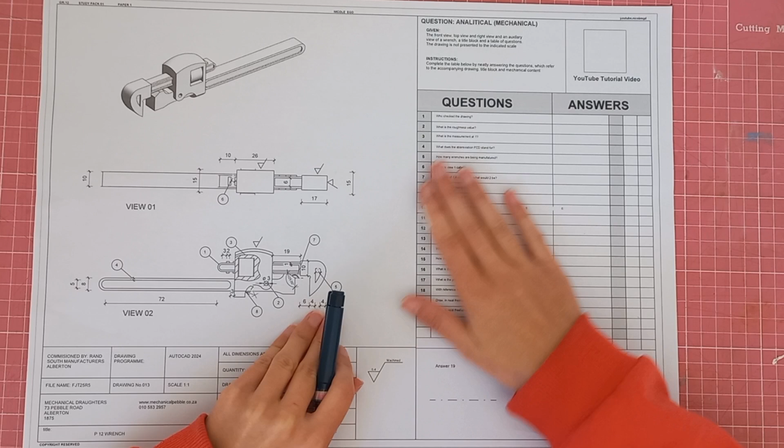Complete the table below by neatly answering the questions which refer to the accompanying drawing, title block, and mechanical content. So it says, who checked the drawing?

We're going to have a look and we'll see checked by Gerry. So we will write Gerry. Then it says, what is the roughness value?

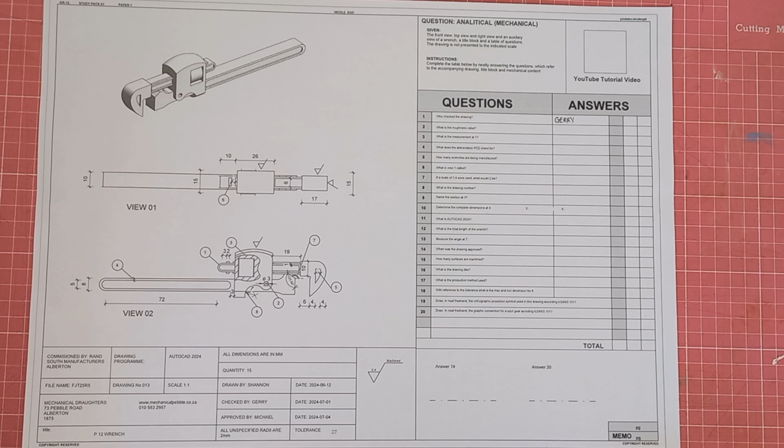This is something you should know based on your studies, where to look, and the roughness value will be 0.4. So you are going to write 0.4.

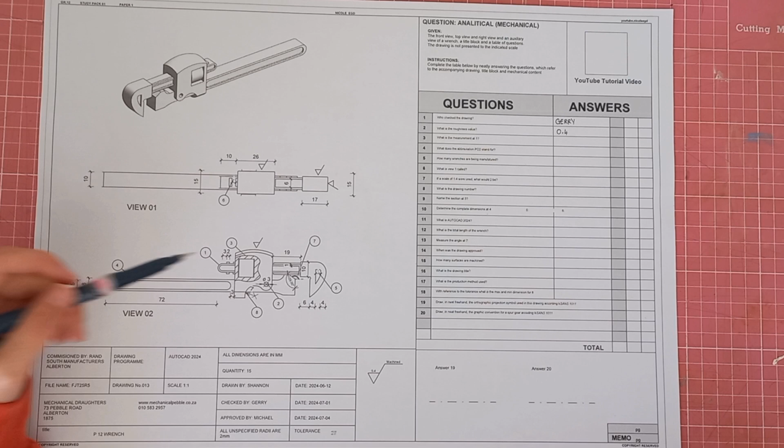Then it says, what is the measurement at 1? We're going to look at 1 over here. You can see 1 is pointing to this inner circle, and because we do not have that measurement given to us, if you look around, you won't see the measurement for any of the circles specifically. We know we will have to look where it says all unspecified radii are 2 millimeters.

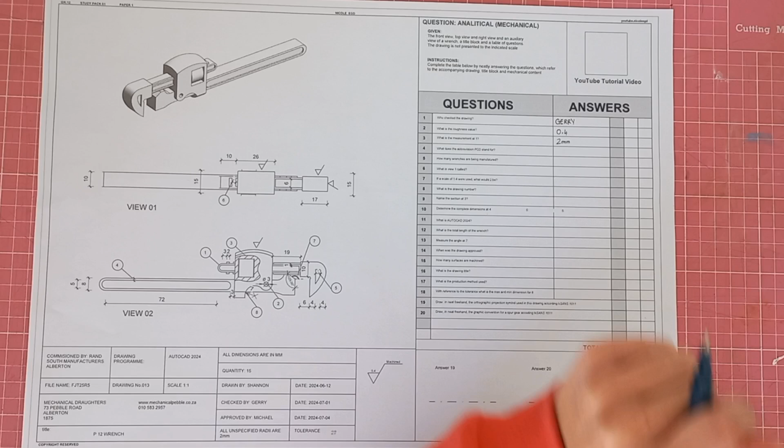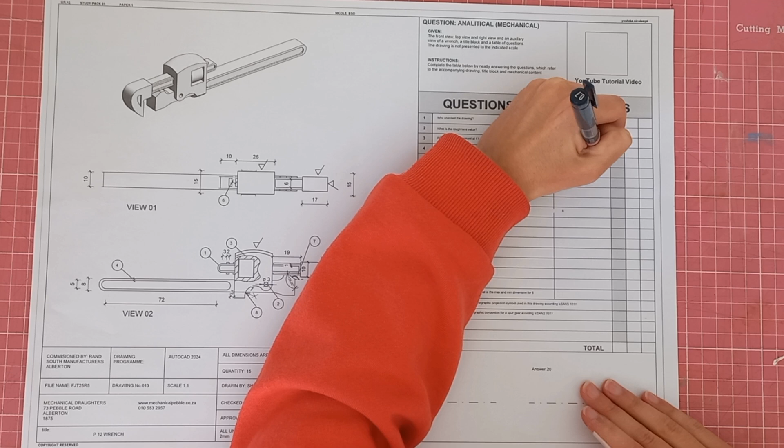So we know the measurement at 1 is 2 millimeters. Then it says, what does the abbreviation PCD stand for? PCD is something you should be aware of, something you've studied. PCD stands for pitch, circle, diameter.

Then it says, how many wrenches are being manufactured? If you have a look here, you'll see quantity 15, and so 15 wrenches are being manufactured.

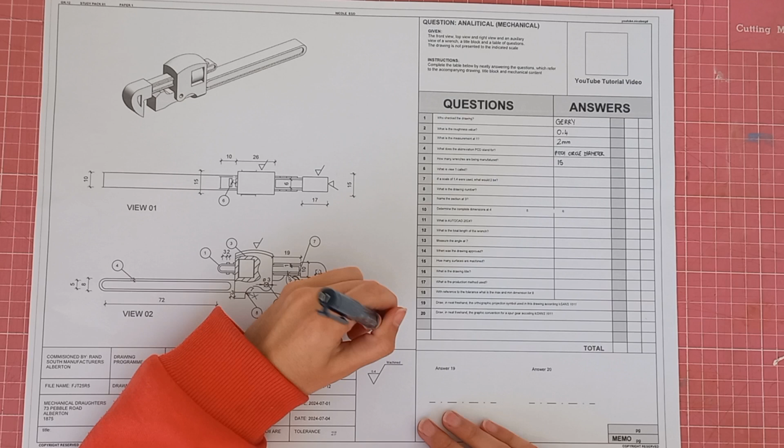Then it says here, what is view 1 called? We know based on the drawing that because this is a mechanical question, we are working in third angle orthographic projection, which means we have top and front. So view 1 would be our top view, so we would write top view.

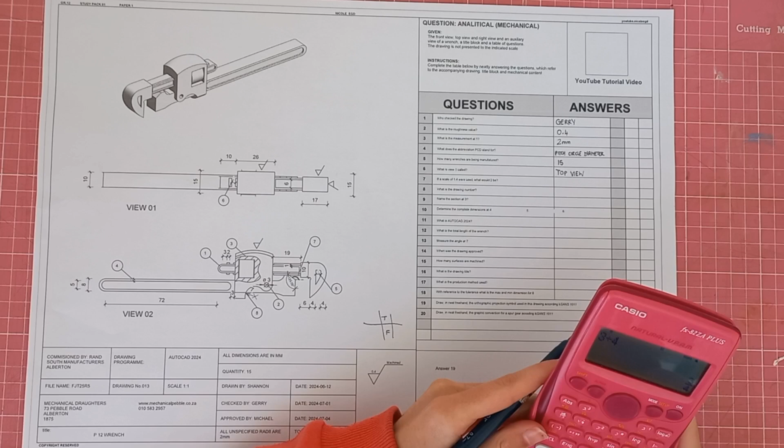Then it says, if a scale of 1 to 4 were used, what would 2 be? So we look at the measurements of 2. It's got a diameter of 3. We know this means it would be 4 times smaller, so 3 divided by 4 gives us 0.75. So a diameter of 0.75 would be used.

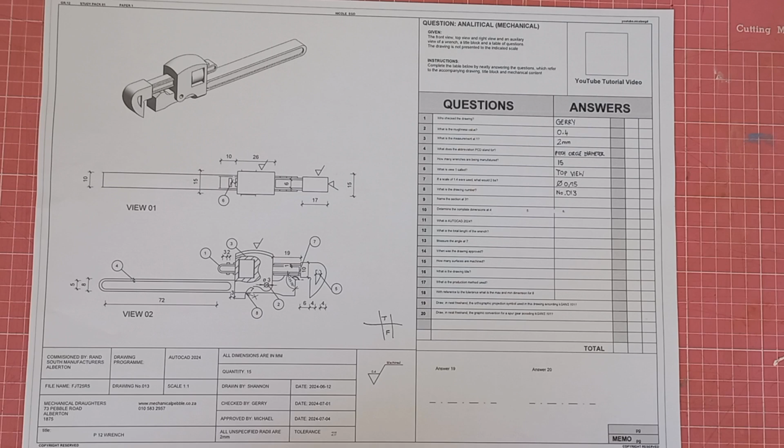9. Okay, name the section at 3. So you'll see 3 is pointing to a little piece over here, and because it's not a full section, it's just a small little section that has been sectioned, it is called a part section. So we will write part section.

Then it says complete the dimensions at 4, 5, and 6. So we are going to have a look firstly at 4, which will be this point here. We obviously are going to have to work this out, and the reason why is because if we have a look here, we haven't been given the measurements for this.

Sorry guys, the cat's just busy driving me mad here. I don't know what he's doing. Okay, so obviously we have not been given that measurement.

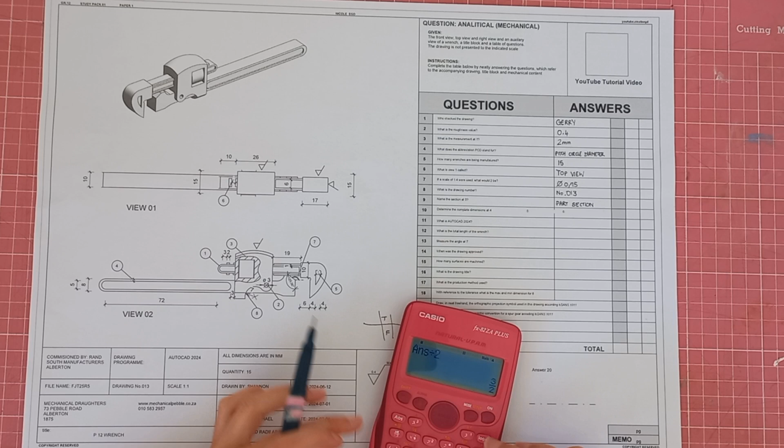We've been given a measurement here of 1, but it's best not to assume what the measurement would be, so we're going to work it out. We've been given a full measurement of 8 and 5, so 8 minus 5 gives us 3, divided by 2, which gives us 1.5. So we will say 1.5 millimeters for 4, and as you can see, it's not the same as 1.

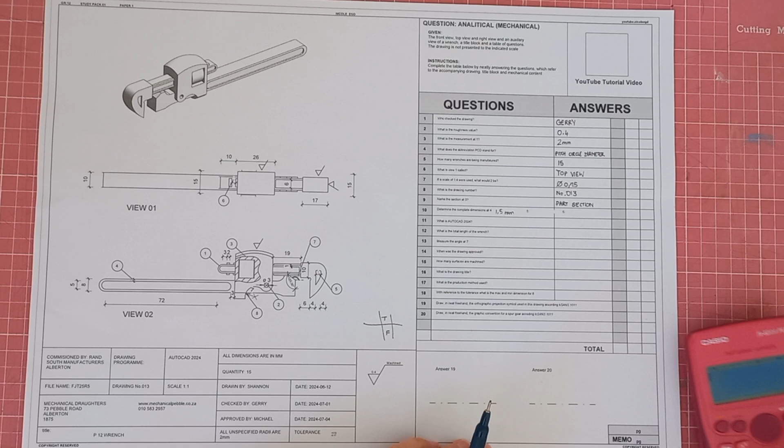Then it says we need to determine the measurement at 5 as well. So we're going to see 5 over here, in the middle of the wrench, and we've been given measurements here, here, here, and this measurement over here as well. So we are going to use this to help determine what it is. We've got 17 minus 6 at this point, then 6 minus 4, which lines up here, minus 4, which is the edge over here. That will give us a measurement of 3 millimeters.

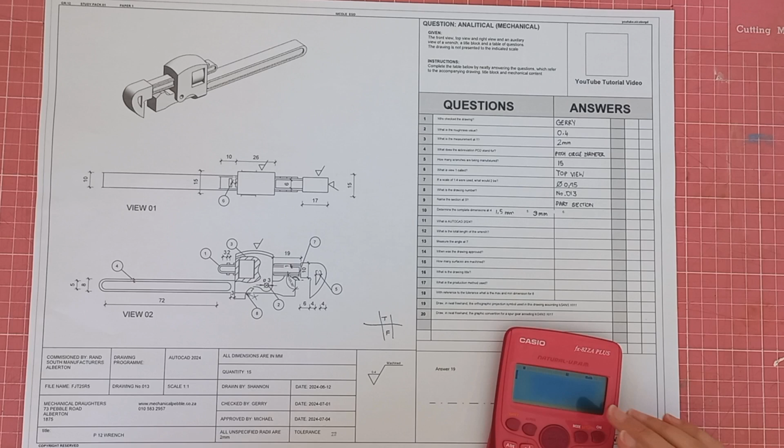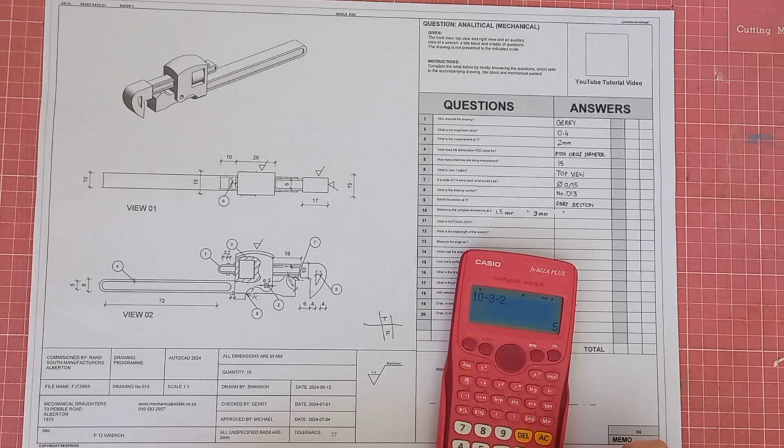Then we've got number 6 that we need to determine a measurement for, and you can see it's got these little gaps here. We've been given a measurement of 10, 3, 2, and we are going to need to determine the radius over here to get the full measurement, because if we have 10 minus 3 minus 2, we get a measurement of 5, but it does not include the circular bit. We know we have a radius of 2, since all unspecified radii are 2, so minus 2, and then it's got a thickness of 1, so minus 1, which gives us a total of 2 for that little section. So that becomes 2 millimeters.

Okay, what is AutoCAD 2024? The answer will be that it is the drawing program. So you are going to write drawing program.

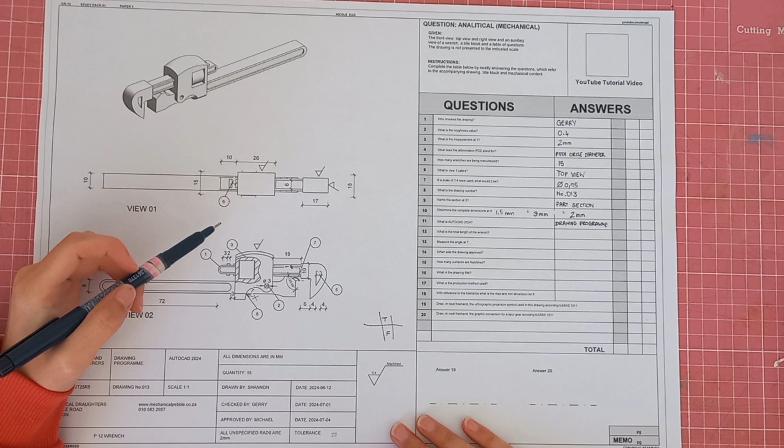Okay, then it says here, what is the total length of the wrench? We're obviously going to have to work that out. So we can start off, we've got 72, okay, and we have got 10, 26, 17, 19. So let's start by adding from this way. To me, that would make the most sense. So we have got 17, then we move on, we've got 19.

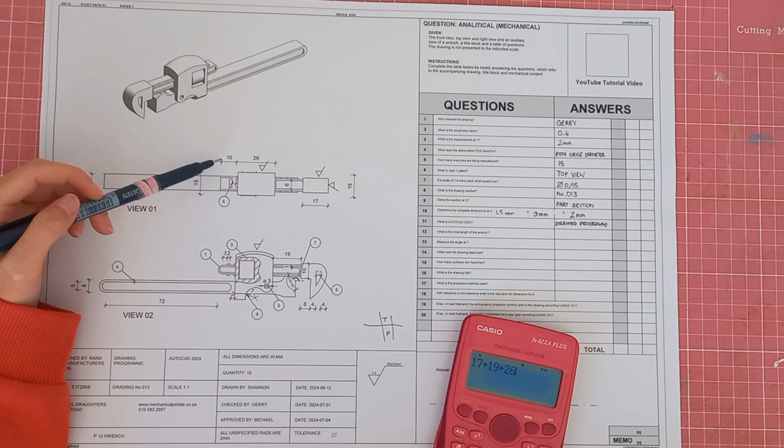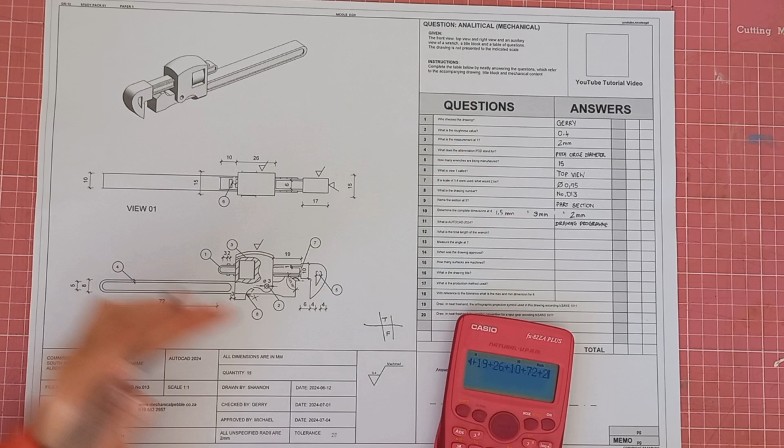Then if we have a look here, this full length here is 26, so we're going to say plus 26. Then we have got here a measurement of 10, which is obviously from this bit here, so we're going to say plus 10. Then we have obviously got 72 from this point onwards, so we're going to say plus 72. Okay, but again, we've got the circle here that we need to account for. So we've obviously got the unspecified radii, which will be 2, so we're going to say plus 2. And then we've obviously got 1.5 for the edge over here, so we'll say plus 1.5. And that will give us a full length of 149.5.

Okay, millimeters. All right, then it says measure the angle at 7.

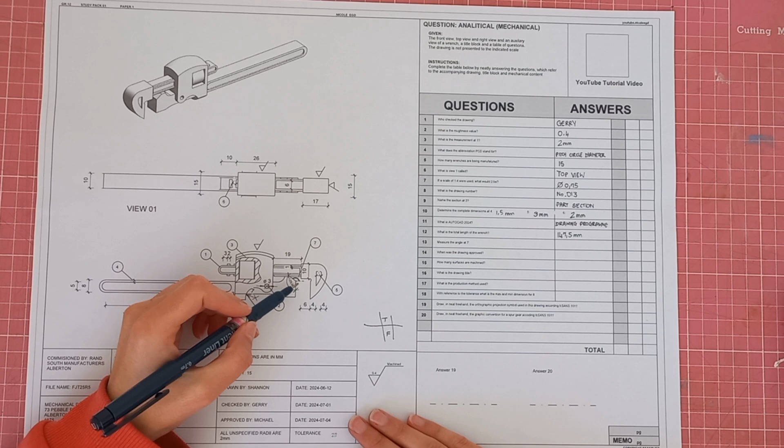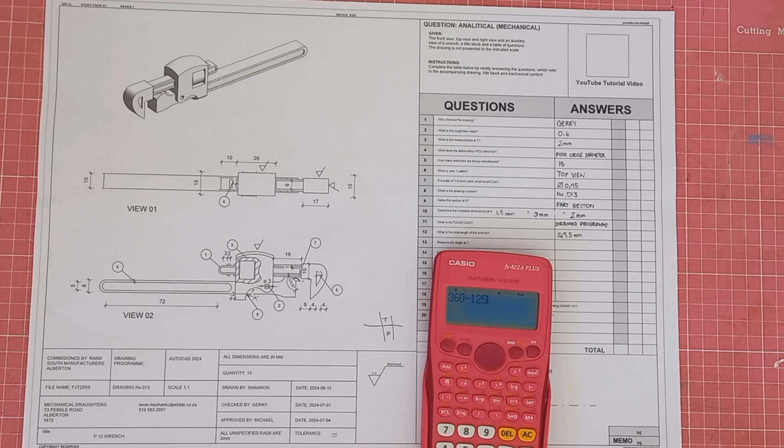So if you have a look here, we've been given an angle over here. So there are 2 ways to work it out. You could obviously use your protractor if that is what you would like to do. But if you are more mathematically inclined and you'd rather use it a different way, which I'm going to use, you can do angles around a point, which we obviously know a full rotation will be 360 degrees. So we'll have 360 degrees, minus the 125 degrees. Then we are going to minus this here, which is 90 degrees. Obviously, just make sure with your ruler beforehand, but yeah, it is 90 degrees. So we're going to say minus 90 degrees, which leaves us with 145 degrees.

Okay, then it says, when was the drawing approved? So we're going to see approved by, then we get the date. So we're going to say 2024 of the 7th of the 04.

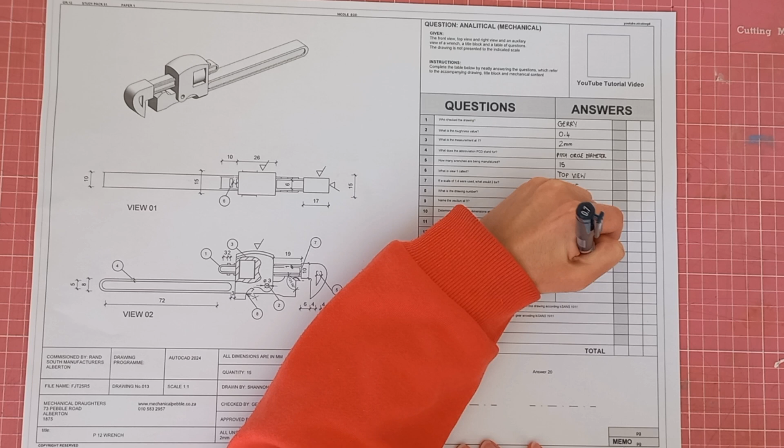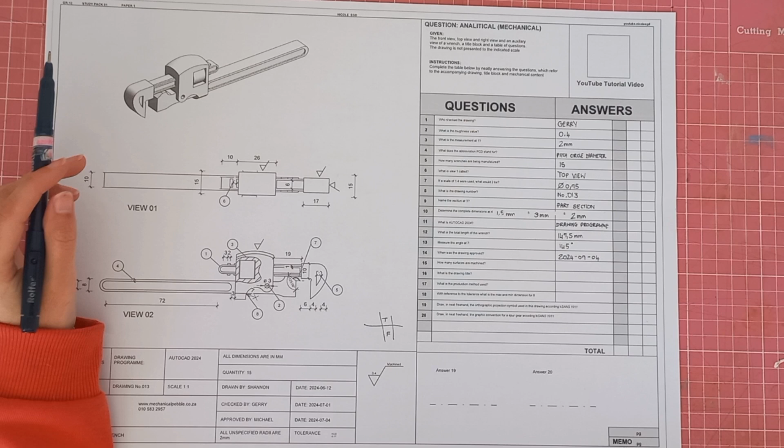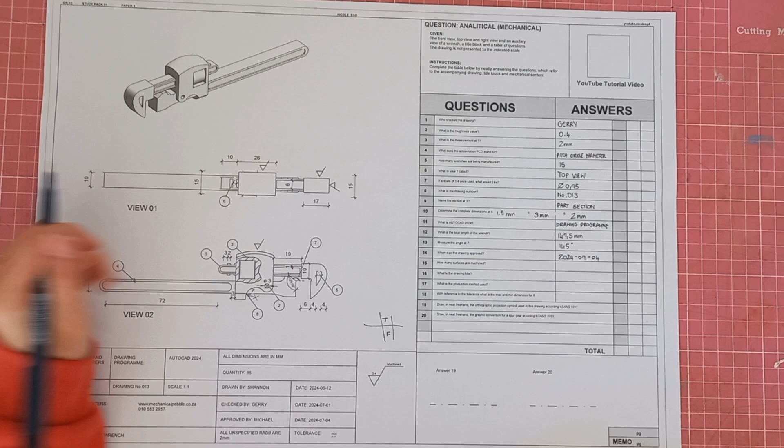How many surfaces are machined? Now this one is very important for you guys to make sure you know what this means. So we know that this machining symbol over here shows that this top side needs to be machined, so that will be 1. Then we have got 2, 3, 4, but that is not a complete answer because the top here would be 1. Then we've got 1 here, but that means that this side here would also need to be machined, and that's something that we can assume. So it'll be 1, 2, 3. Same with this side here, 4, 5, 6. Okay, 6, and the bottom here, which would be 7 as well. So we are going to say 7 surfaces need to be machined.

Okay, then it says what is the drawing title, and if we have a look here, the title is P12 wrench, so you can just write P12 wrench.

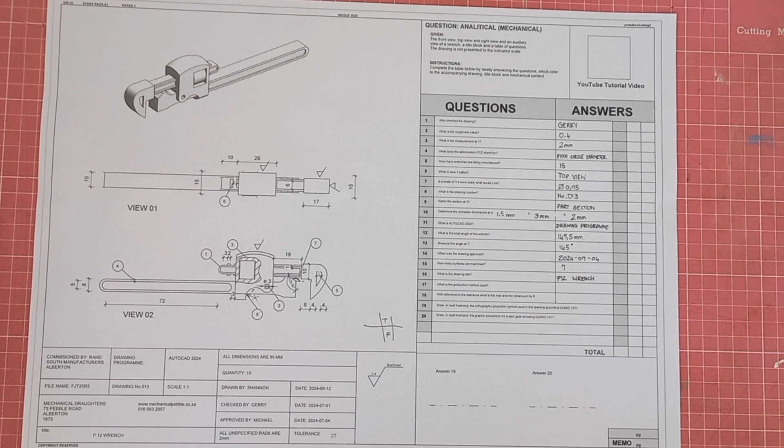Okay, what is the production method used? So we're going to have a look here, and you can see the production method is machined, so we are going to write machined.

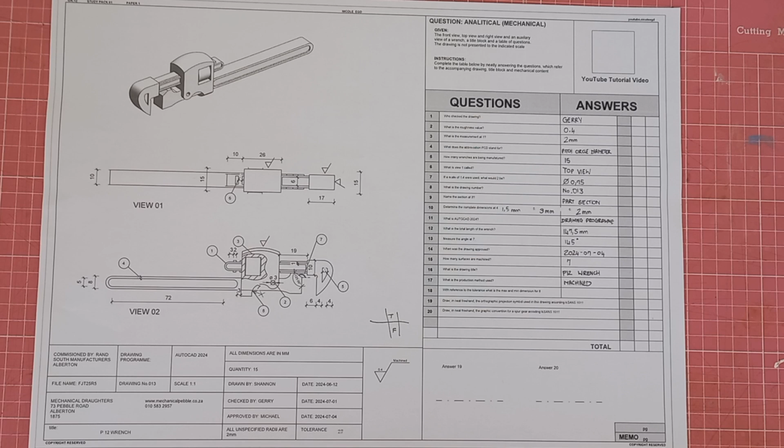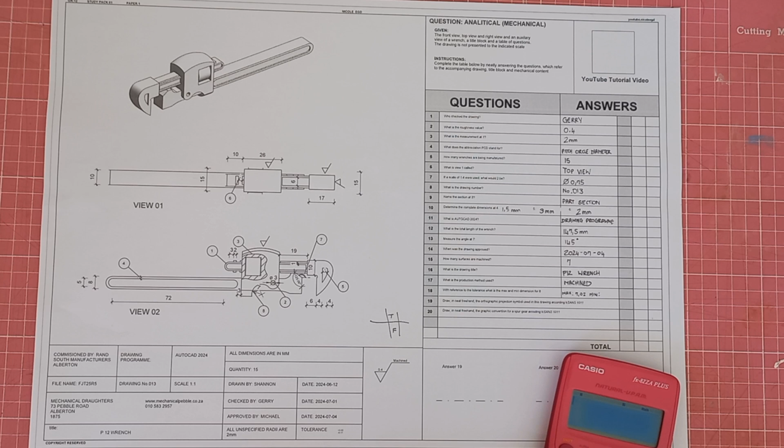Okay, and then it says with reference to the tolerance, what is the max and minimum dimension for 8? So we're going to find number 8 first, which is here, it points to obviously 7. So the max would be plus 0.02, so we would have 7.02, and the minimum would be minus 0.17, so we would have 7 minus 0.17, which would give us 6.83.

Okay, then it says draw in neat freehand the orthographic projection symbol used in this drawing according to SANS. Okay, so that's obviously answer 19. Now, because we know that this is third angle orthographic projection, our projection symbol will be a circle followed by another circle. Just make sure yours is done neatly in freehand, followed by this over here.

Okay, and then it says draw a neat freehand the graphic convention for spur gear according to SANS. Okay, so this one's going to be a little bit more tricky. This is obviously something you would have had to have studied in order to know what that is. So let's just do it together.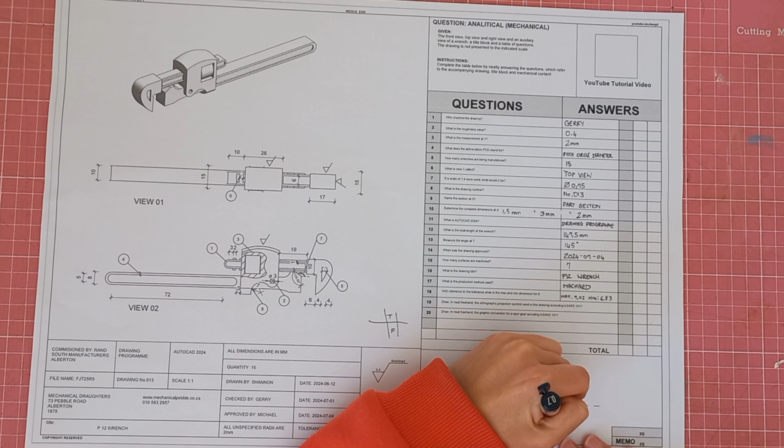We're going to start off with a little circle here and like a little keyhole. Okay, then we have got a circle going around that, this over here. All right, and then we obviously have our center line. So we're going to do long line, short line, all the way through like that. Then we've obviously got the edge as well, which will be long line, short line, long line, short line, long line, short line, all the way around, just like this over here.

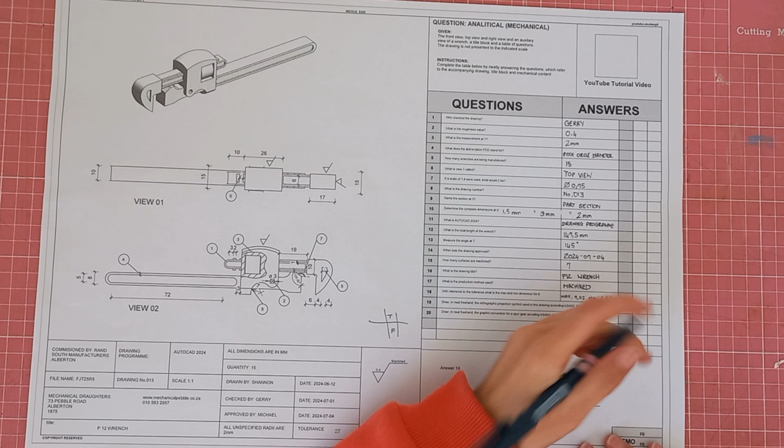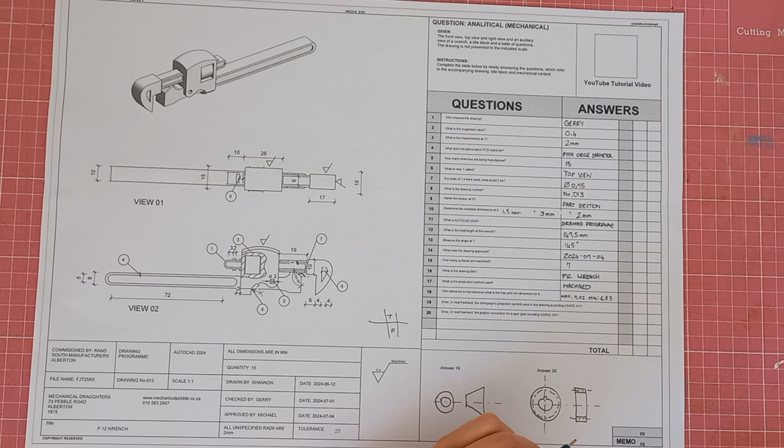But then we are not done. We still need to do the other side for it. So we will draw this in over here. Okay, we will obviously have a hole here and a hole here because obviously the spurs of the gear. So there will be a center line going through there and there. Okay, then we've obviously got a solid bit here and then the keyhole. So the solid bit we will then hatch. Okay, we've got the keyhole and then the normal hole, and then we will finish off our hatching again.

Okay, so there we go. That is your mechanical question done.